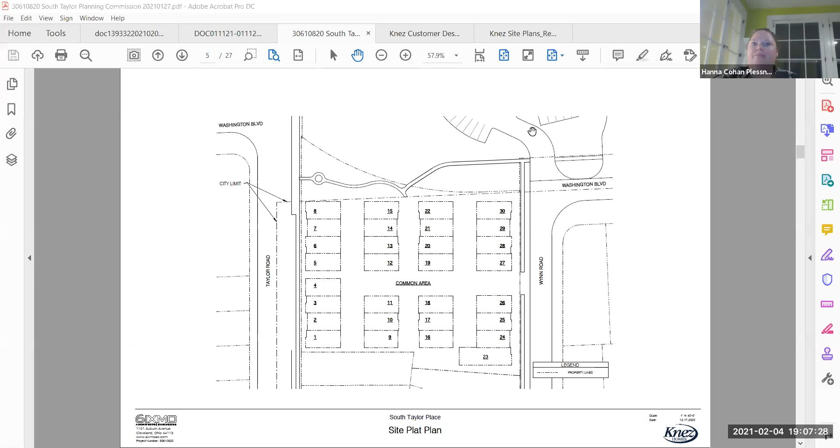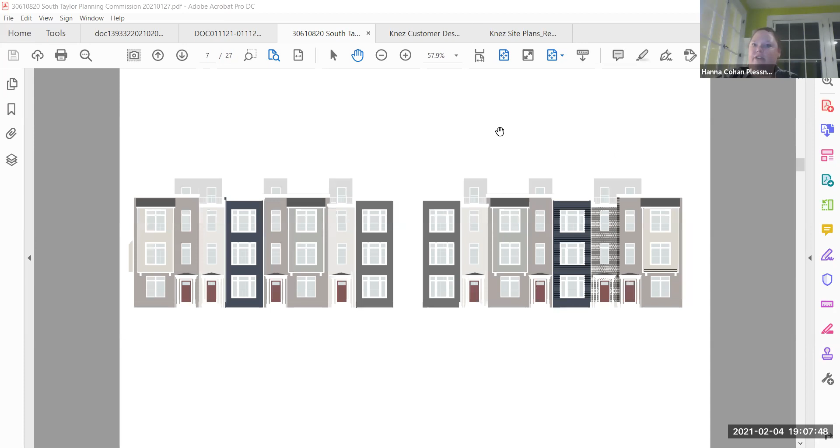The bigger change we were able to make was to this old elevation for units 1 through 8. These are the units that front on Taylor, on the more commercial side of the project. We had a lot of conversation about the roof decks and what kind of views we were going to be getting, so we decided to make a change on these two buildings so that we're looking at more of a flat roof style. These are also the units that have brick on them, and we think the brick with the flat roof fits really well with the commercial district.

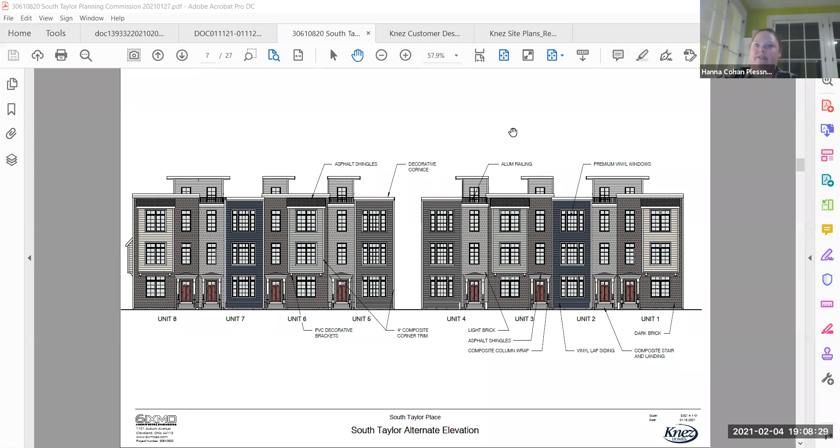This gives all of these units a roof deck, so they're not optional on these. All 8 units will have a roof deck no matter what, and it orients those decks to the front of the units. These 8 units, we believe, will have the best city views as they're oriented the right way to face downtown. So these units will have front-facing decks to activate the street corridor on Taylor, as well as maximize any available city views.

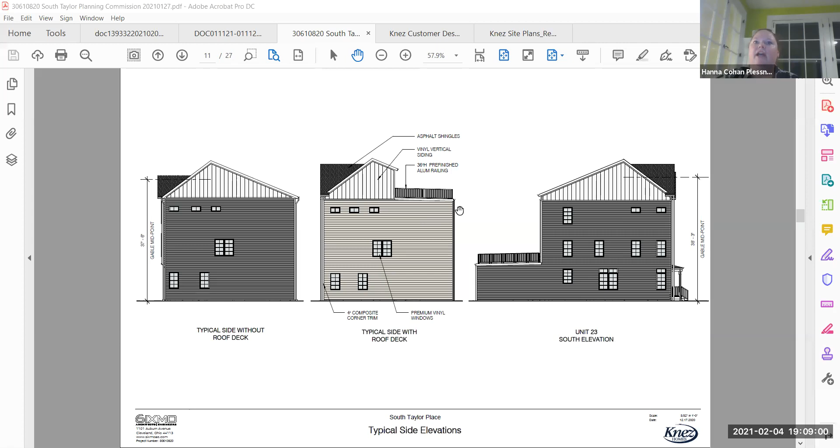The rest of the units throughout the interior of the site and on Wynn would keep their gabled roofs at the front of the unit, so they fit with the residential character of the neighborhood, but they would have the optional roof deck on the rear that we showed previously. So it would either be a full gabled roof, or if the client selects it, the front will have the look of a gabled roof, again to fit in with the community, with a roof deck on the rear of the unit.

The other change we made is we got feedback on the 4 units to the north of our site that look out over that open green space, that we should add some more windows. So we were able to add more windows to these side elevations, and we added a bay which lands in the dining room of the floor plan, so there's a bit more of an architectural feature there. There's a bump out you can see here.

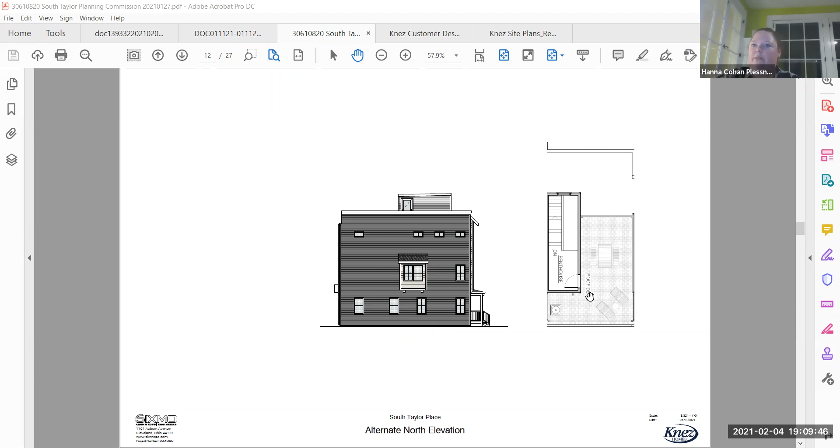This is the side of the flat roof unit at the front, so this would be unit 8, but it would be similar on the units that have the gable roofs that face that green space as well. This is just a plan of how that roof deck works for those front units. You can see you come up into just a little, we call it a doghouse usually, basically just a landing at the top of the stairs that takes you out onto your roof deck and gives you that big open flat roof.

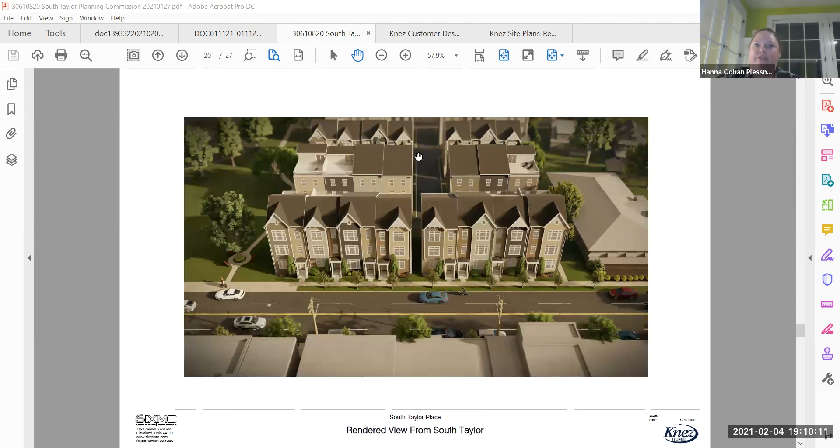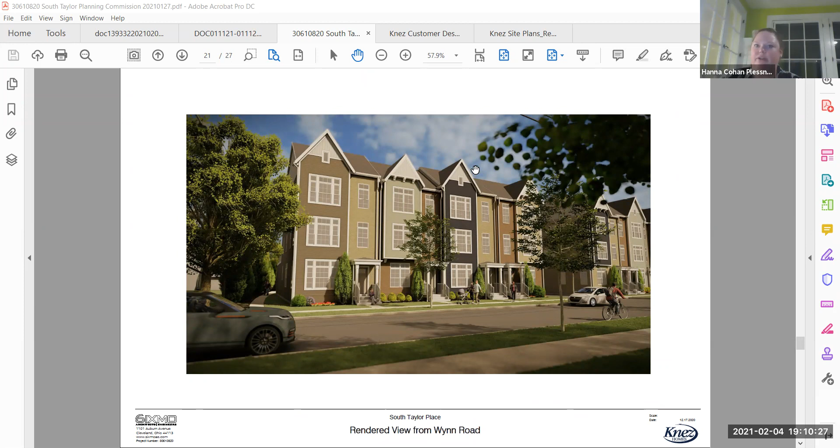I'm going to just go to the rendering. So this has the gable roof still on it, but the intention is for those to be the flat roofs, and the units behind would remain the same. So that's a summary of the changes we were able to make. We hope that can alleviate some of the concerns that were raised previously, and we're hopeful we can move forward to the next step of our process after our meeting tonight.

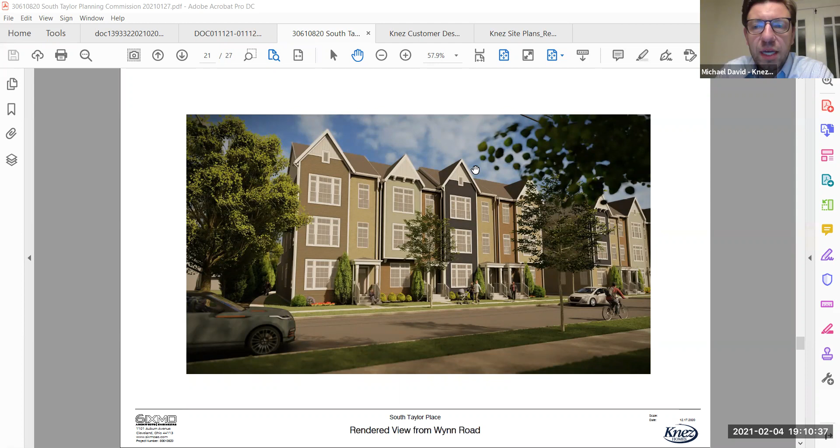Hannah, can you go back to the site plan for a second? Yes, thank you.

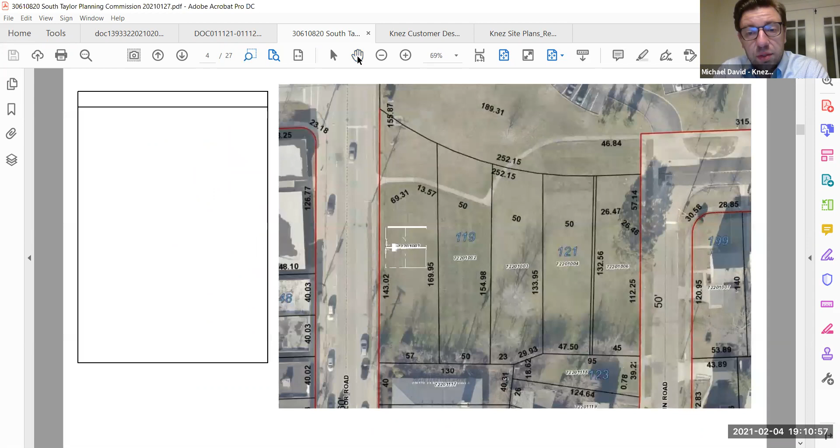I wanted to bring up a couple of items that played into our consideration of some proposed alternate designs, as well as why we made some of the choices we did for the site plan. This site has a lot of utilities and easements running through it. If you notice at the northern part of the site, there is what was requested by engineering, an 8-foot clearance—I don't believe there's technically an easement on it, but we wanted to provide clearance so that the sewers on the northern part of the site could be accessed. Additionally, we didn't want to bring the units into Cleveland Heights because the city had requested that we maintain it within University Heights so that the project can be controlled by University Heights. If it were to go in there, there was some concern that they would have a say in the project as well, which would potentially delay the project, and we'd have conflicting opinions from different cities on what they may want.

Additionally, Mike—can I interrupt you there for one second on the Cleveland Heights issue? There were really two main concerns that we had about encroachment into Cleveland Heights.

One issue was opening the project, or at least a portion of it, up to Cleveland Heights approvals on the site plan, which we thought could get thorny. The other significant issue is that all of the land in University Heights is within a community reinvestment area and therefore eligible for tax abatement. Whether the land in Cleveland Heights is eligible for tax abatement is unknown, and so it could create some uncomfortable tax issues for potential owners of the property, as well as a developer moving forward.

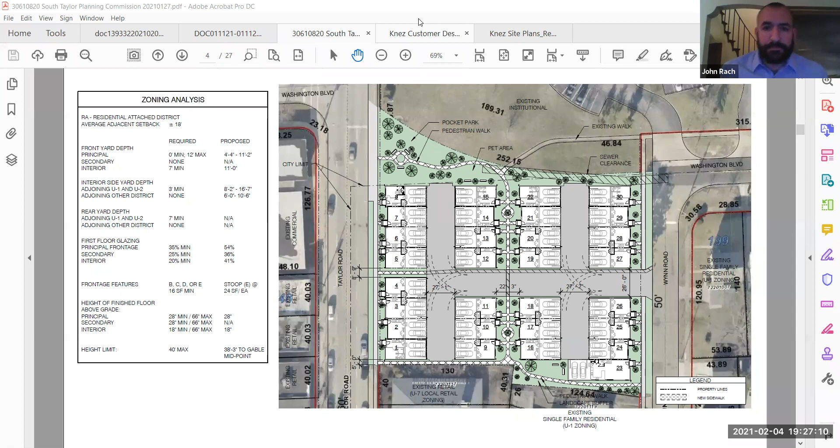If it's of interest, I'd be happy to go through some of our other successful townhouse projects with similar setups, just to give you a general idea of what our typical townhome developments look like. Let me see if I can share my screen.

Just to give you a brief overview, this is one of our projects, actually in the heart of downtown. This is 27 units, no guest parking.

This is an up-and-coming project in the Glenville neighborhood. Can you go back to the last one?

You say no guest parking, but you can park along East 14th. That's Masthead to the left, right? The bar, yeah, it's down 2 blocks. Well, I park there all the time, along East 14th Street, and there's parking available there. There is street parking, that's correct, but there's no dedicated on-site parking for our units.

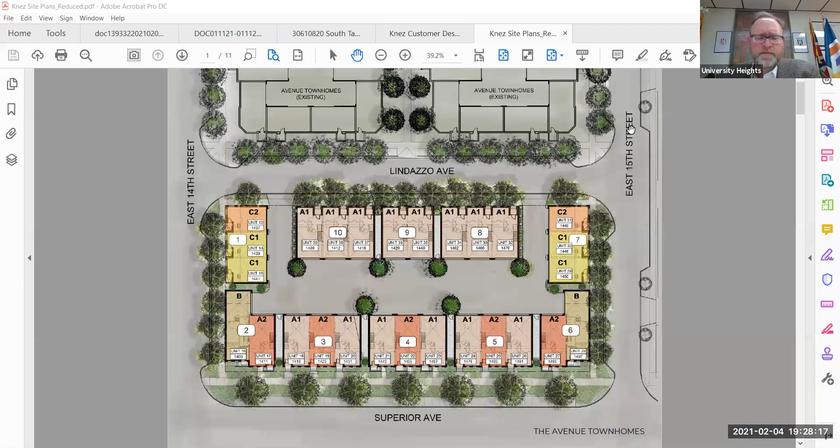But not really, because it's very limited. We have parking, but we really don't have enough parking now.

Just to run through a few more, this is in Glenville, a more residential setting. This is 36 units with, again, no on-site guest parking. Wade Park Avenue is such a wide street, you could park on both sides of the street.

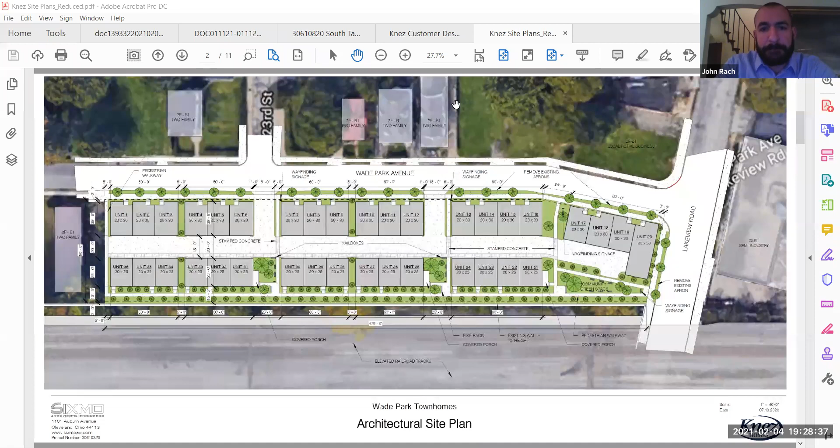As an employee of the university, I can speak to the lack of parking in that particular area. But you can park on either side of the street. No, it's forbidden, it's blocked off. Is it permit only?

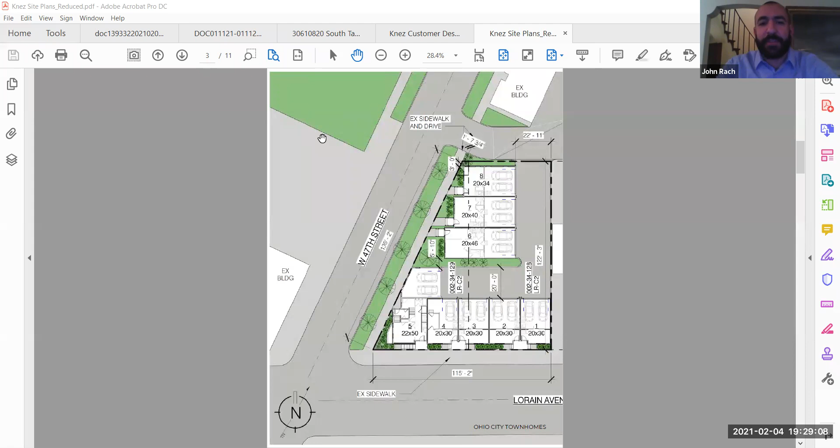Permit only, so residents can get permit parking, not employees of the university, but guests. Right, residents could. But not guests - that's what I'm talking about. Oh, I thought you were talking about guests. So guests would be a no.

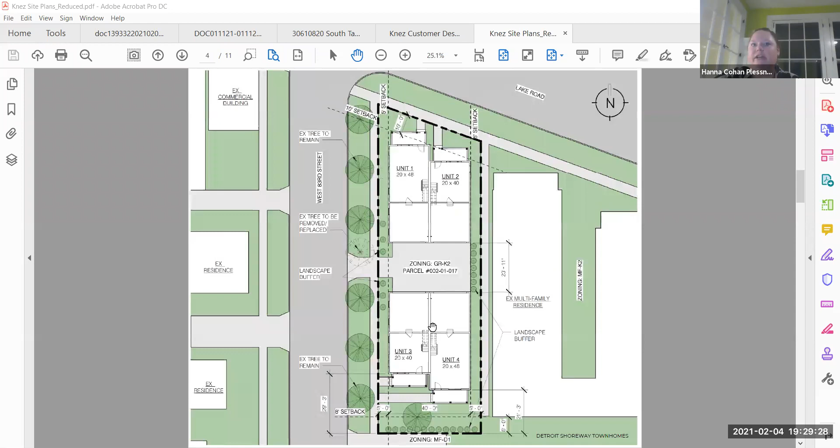So this is an example in Ohio City, another curb cut development where everyone comes in and goes out the same way. It's a little smaller, but a different kind of configuration. This is a 4-unit, again just one way in, one way out, in a pretty residential setting.

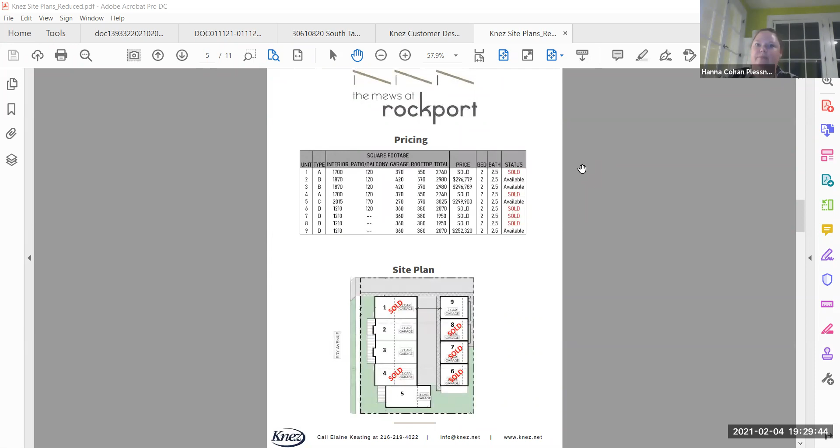This is in Lakewood, a similar inner-ring suburb. Not a lot of street parking, but there is street parking. This was 9 units, we have no issues. This sold out very quickly.

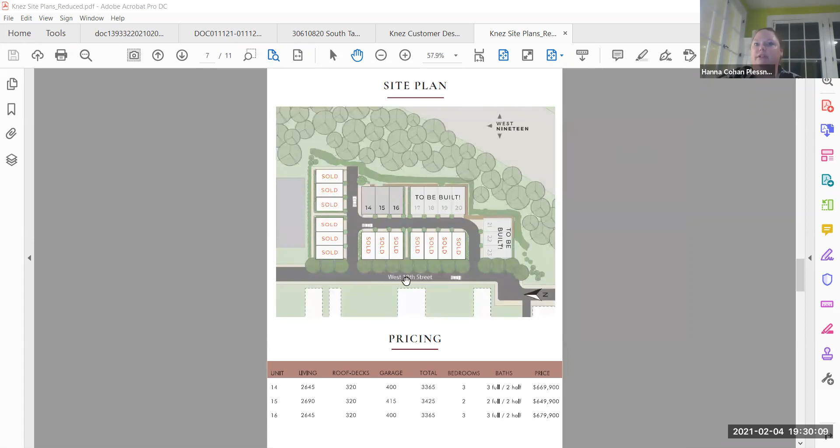This is in Duck Island. Again, no on-site parking. There is limited street parking on 19th Street and ample street parking on the blocks around there. This is in the Detroit Shoreway neighborhood. This is 9 units, again, one way in, one way out. This is sold out.

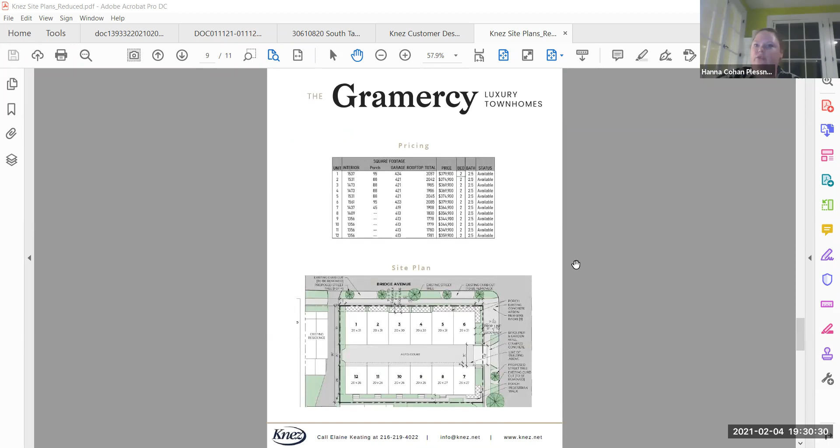This is a proposal we have going in Ohio City for 12 units. Again, one way in, one way out.

This is one of our upcoming projects that we are very excited to start construction on in the next couple of weeks, actually. This is 56 units going in Ohio City. This is a residential neighborhood. There is street parking, and one of our goals with this project is to create density, promote transit use, promote walkability, bikeability. And the city was very excited about this and certainly not interested in adding surface parking to it.

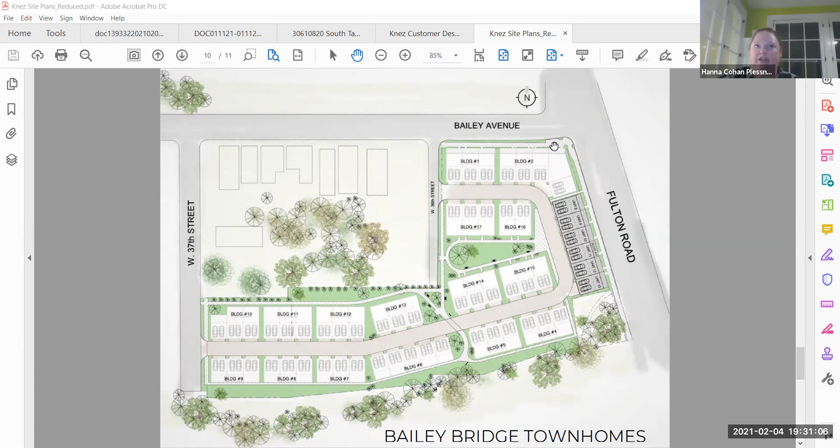And this is just one last one. This is also in the Glenville neighborhood near University Circle. This is 18 units, again, with a single curb cut entrance. And we do have bike parking on site. We have bike racks, again, to promote the walkability, bikeability of the neighborhood over encouraging more vehicular traffic.

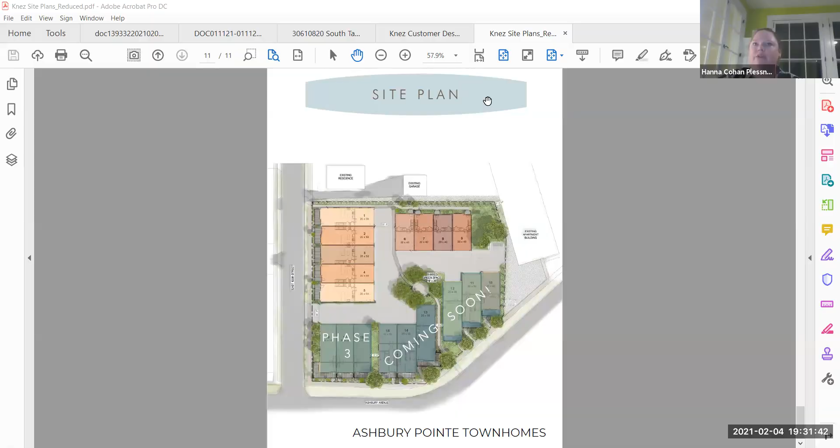So there's just a couple similar projects. I will say this is something we do all the time. We've been very successful with our townhome developments. This has not been an issue for us, and we don't expect that it's going to be a roadblock for this project in University Heights.